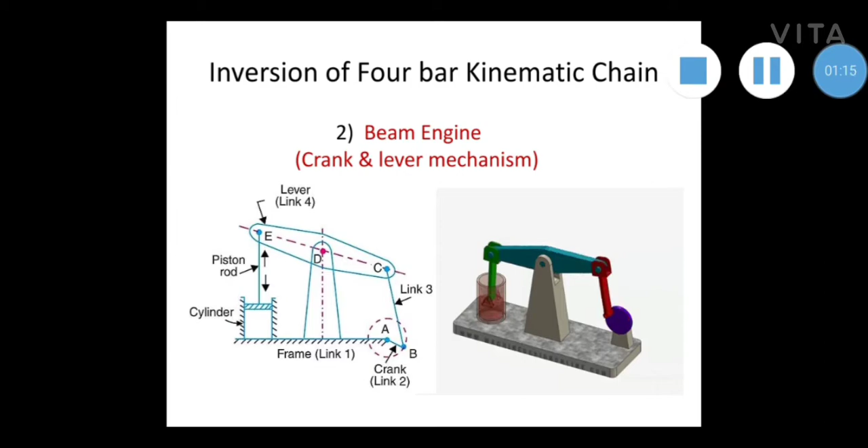This is the AB part, which performs a rotary motion, and this AB part is connected further from point B to point C. It is connected to a lever mechanism. This EDC performs a lever mechanism which fluctuates up and down, and further from point E it is connected to a piston.

When this crank rotates in this direction, it leads to an oscillating movement of this lever. When this lever shifts upward, through the connection of E to the piston, it leads to reciprocating motion, that is, the piston will move in upward as well as downward direction.

This movement is clearly visible from this second diagram. Here this part is performing a rotary motion, and see how the lever moves upward and downward, and from the other end of the lever it is connected to a piston. The piston performs a reciprocating movement, moving upward and downward inside the cylinder. So this is all about the mechanism of a beam engine, that is, a crank and lever mechanism.

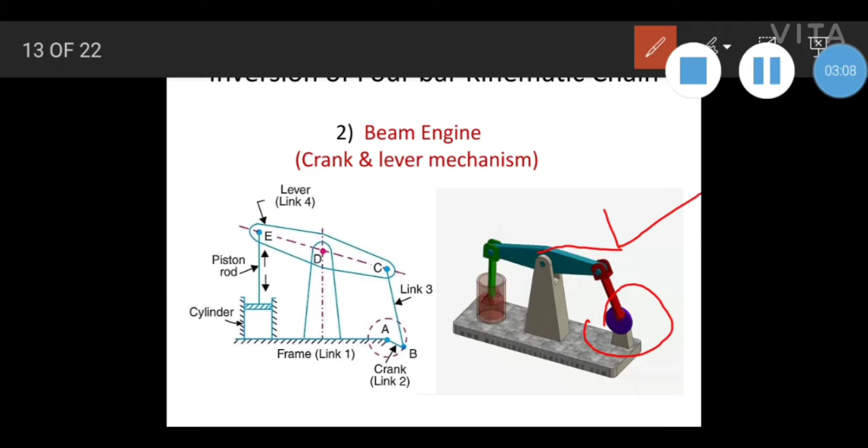Now we will discuss the inversions of a single slider crank chain. First is the reciprocating engine mechanism, the first inversion. A reciprocating steam engine mechanism is obtained by fixing link 1, acting as a cylinder. It consists of 4 links, namely crank, connecting rod, piston and cylinder or fixed frame. There are 3 turning pairs, O, C, P, and 1 sliding pair formed by piston P.

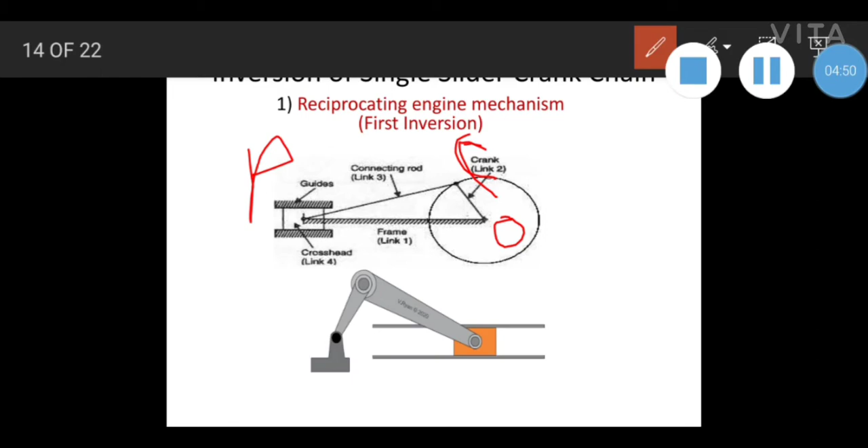Now let's see the naming. This is the O point which is fixed, this is the C point, and this is the P point for the piston. So there are 3 turning pairs, O, C, P, and 1 sliding pair, P, which is the piston, in a fixed cylinder shown in the figure. As the piston reciprocates in the cylinder, the crank rotates about a fixed center, so the function is to convert reciprocating motion into rotating motion of the crank.

We are able to see that motion from the second part of this diagram. From here we can clearly understand which is performing reciprocating and which is performing rotary movement. As the piston moves in the forward direction, the crank will move in the forward rotation.

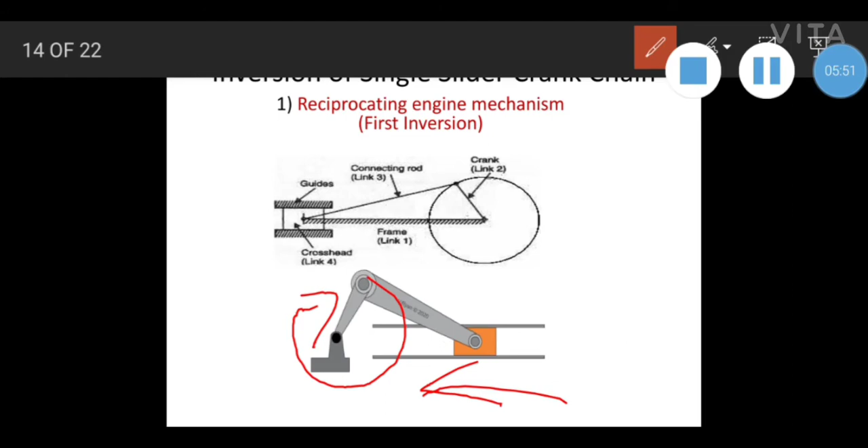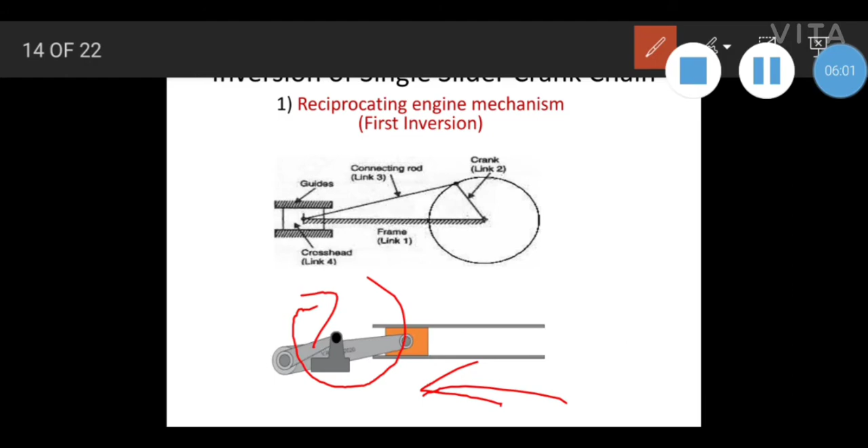At a certain interval of time, when this piston goes back in the backward direction, the crank rotates further back to the original point, and this is how the rotating motion is obtained using the connecting rod connected to the crank. So this is all about how the mechanism takes place for a reciprocating engine.

Now we will look at the next inversion of the single slider crank chain, the rotary internal combustion engine, the second inversion. This is an inversion of the single slider crank chain mechanism, which we can see from the first figure. It consists of 7 cylinders. The second diagram is an overview to understand the mechanism.

In the second diagram only 5 cylinders are present, but actually it consists of 7 cylinders lying in one plane, and all revolve around a fixed center D. The crank, link 2, is fixed, while the connecting rod, link 4, rotates; then the piston, link 3, reciprocates inside the cylinder forming link 1.

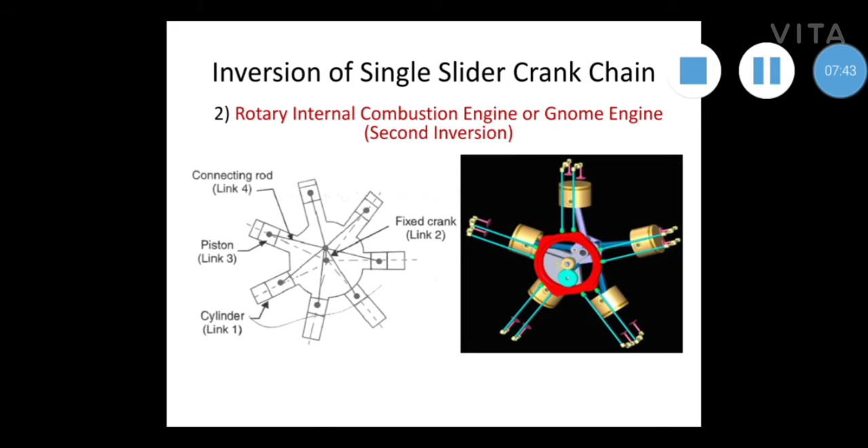We can also observe how the mechanism is carried out in this IC engine. There are valves present at the top side of the IC engine. As the piston reciprocates, depending on whether it is moving upward or downward, the valves get activated and the function is carried out.

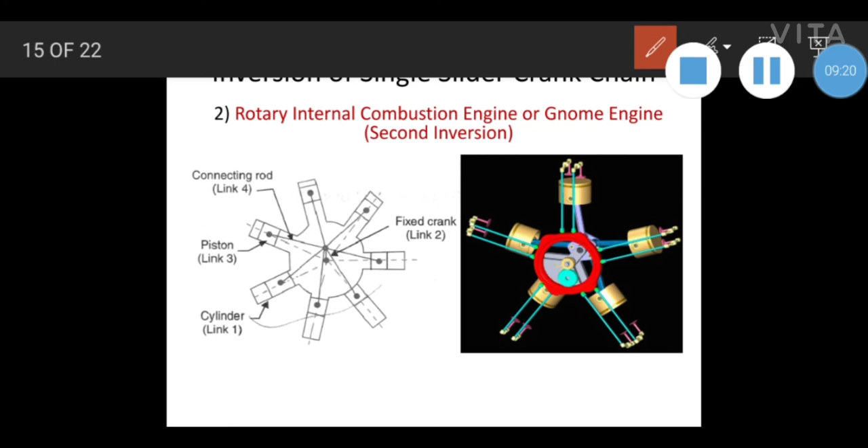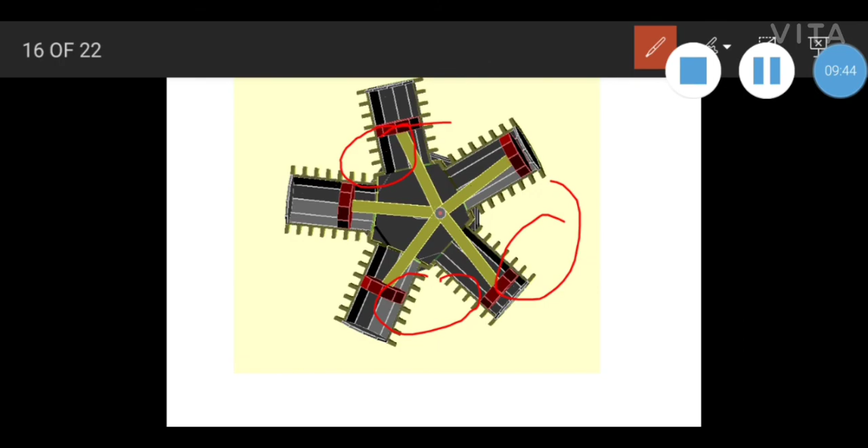We will see one more diagram to get a clear understanding of this rotary internal combustion engine. From this second diagram we can see the movements of the piston. Observe: now the piston is at the top side, and at this point the piston is at the downward side. So there is a change in the location of the piston, moving upward and downward. This is all about the rotary IC engine.